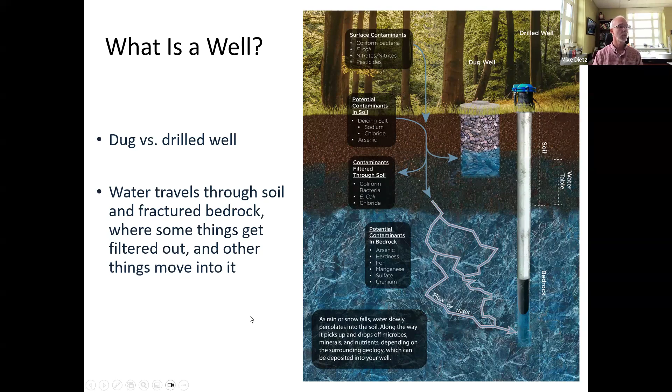Dug wells, you've probably seen this at some point, but these types of wells are often not sealed very well on the surface. I grew up in a house, for example, that had just a well house over a shallow dug well. When we would open up that cover, you would see a snake sitting there by the edge. It was very easy for things to fall down in there. So as you'd imagine, these types of wells are highly vulnerable to surface contamination on a good day, not even talking about a day when we have flooding.

I'll put one other note in here. Almost every dug well or shallow well that we've tested for our well testing program has come up positive for total coliform bacteria, and many also had E. coli bacteria. So these are things that are very concerning.

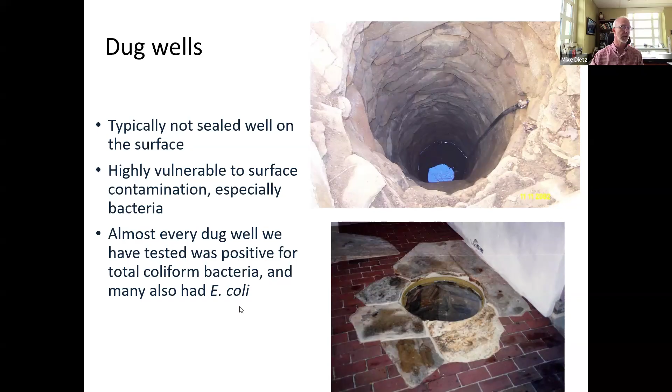Okay, so I talked about shallow wells, and now the difference with a drilled well is that a section of steel well casing is put down through the shallow soil. So we are now excluding water that's in the soil, that upper shallow groundwater. The bedrock casing is driven down and is supposed to be sealed into the bedrock so that any surface water that doesn't have a chance to pass down into the bedrock cannot get into that well, in theory. Then there's just a borehole cut down through the bedrock itself, and that's where water is drawn out from a pump placed down inside there.

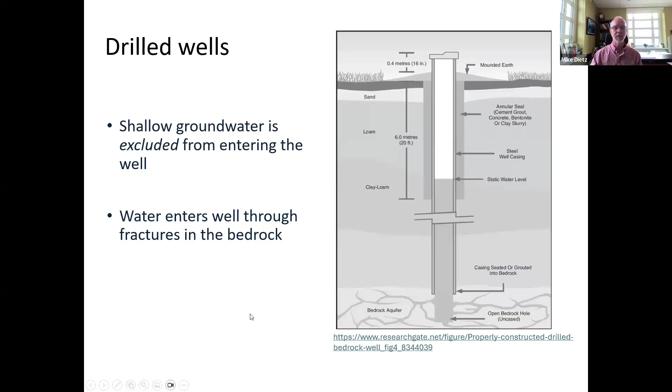So I'm going to give you a little bit of information about our well testing program that we've been doing for a few years here at UConn. This is just a little background, so it gives me some context to talk about the impacts from flooding. We've been doing some outreach for the past few years, and this isn't just me.

This is my former master's student, Alec Janis. He's at the table there, taking a sample from some folks bringing it into one of the events we hosted. We've been holding these reduced cost events and testing funded by a USDA grant and through some funding from the Institute of Water Resources. We've also been taking samples on a walk-in basis here on the UConn campus.

We found that many people, when they would test their well at all, which most people were not doing, the results they'd get from labs were often hard to interpret unless you had an advanced degree in chemistry. So we tried to make this much easier to understand for an average person, with clear indications of whether their water was meeting water quality guidelines. We also post Connecticut Department of Public Health's fact sheets from their website, and we've added a few of our own.

To date, we've tested over 800 wells in the state, quite a few across the state through various events and folks dropping in samples on the main campus. This is just a quick summary of the exceedances we found from those 863 wells we've tested to date. We've had quite a few exceedances of various parameters, which you can see on the left there.

The one that stands out is total coliform bacteria at the top, with 269 exceedances, which works out to 34% of people tested coming back positive for total coliform bacteria, 1 in 3. So how many people showed up in our meeting today? We got 61. So 20 of you, if we tested your water today, would likely come back positive for coliform bacteria in your well.

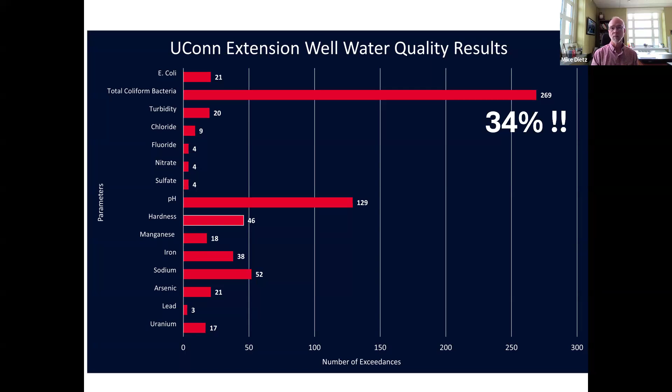This is obviously a very common concern. The coliform bacteria themselves are not necessarily harmful to your health, but they are indicators that other potentially harmful things could be getting into your well. I'll talk a little bit more about this.

Now let's get into the flooding issue and how this can impact private wells. If we have water ponding near or on top of your well, this is obviously very problematic, especially for a shallow well. These are the most vulnerable, because the water can pour directly in very easily, carrying with it the things that can enter in floodwaters.

If you've seen floodwaters come into your neighborhood, you know what they look like. It typically looks like chocolate milk. And there are lots of other things in there that should not be getting down into your well, things like bacteria, nutrients, and other potentially toxic substances it picked up along the way.

So although shallow wells are the most vulnerable, drilled bedrock wells can also be contaminated from floodwaters if that water gets over the top of the casing, or even below the surface, which I'll talk about in a second.

First of all, if you see this kind of condition on your property, you should stop using your water immediately. You do not want to be running that well if surface waters are getting in there. And you want to make sure you turn off the power to the well also, because if you flip on your tap by mistake or flush a toilet, that well is going to kick on even though you may not want that water coming in.

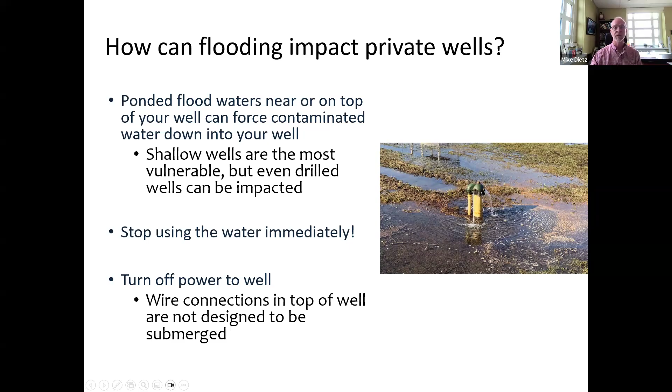So the best advice is to flip the breaker and turn that well off. Also, it actually may have been tripped anyway, because the wire connections at the top of a well are not usually set up to have submerged conditions. So that may have tripped the breaker already, but if it hasn't, you should turn it off.

After the floodwaters recede and it's safe to get out there, you should inspect the wellhead, look for evidence of water that had entered the well or rose up over the top of it, and see if it damaged the well casing, the cap, or anything nearby.

The next piece of advice is to chlorinate that well. There's a procedure for this that Connecticut DPH has on their website. The link is here, and I'll mention, if anyone is interested in these links, I have a couple in my presentation that I can drop into the chat when we're done.

Basically, you use the depth of your well to figure out roughly how much water you have in there, then measure out a fixed amount of chlorine bleach to mix with some water and dump down into that well. That's the basic procedure—it then runs through all the piping in your house and sits for a period of time before getting flushed out. The specifics of that procedure are in this guidance document here.

It's pretty obvious, I think, how flooding can impact a private well. But from what we've been finding, even heavier than usual rainfall can actually impact water quality too. So it doesn't necessarily need to be an obvious flood on your property, and this can also happen with bedrock wells.

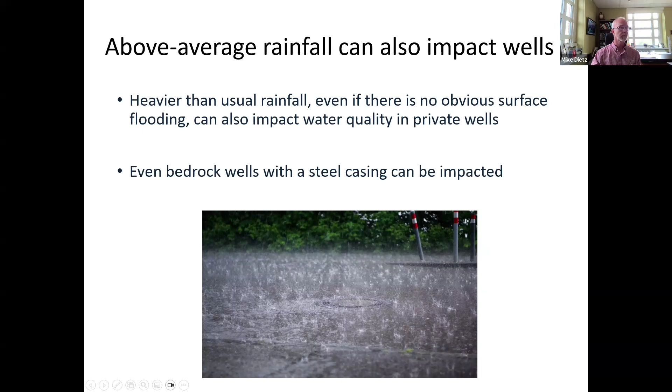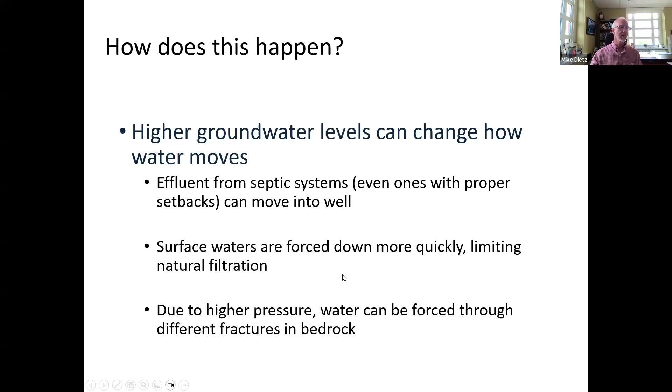The reason this can happen is that when we have excessive precipitation, it basically changes the subsurface hydrology. It raises that shallow groundwater table, and when that happens, it changes how water moves underground. It creates a higher pressure condition that can force water into places it wasn't normally going under normal groundwater conditions—forcing water into different fractures down in the bedrock, or moving it into different places even in that shallow soil.

So I guess I should start with this: many people that have a private well on their property also have a septic system.

It's not always the case, but for most people it is. There are regulations that dictate the setbacks between that private well and the septic system. But when we have an excessive amount of precipitation that raises those shallow groundwater levels, that can force water to move into different places that we would not expect it to be going. So there can be higher chances that untreated septic water could be entering private wells, either from yours or someone else's nearby.

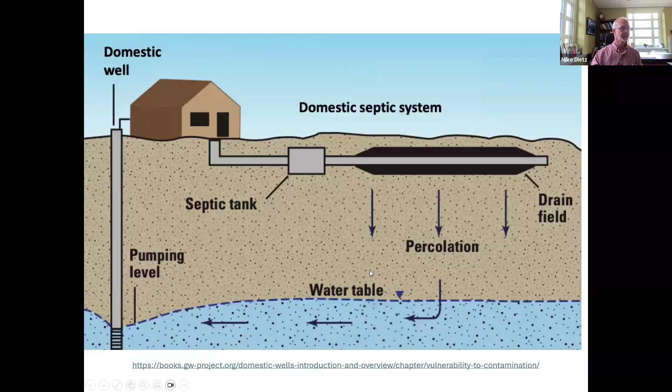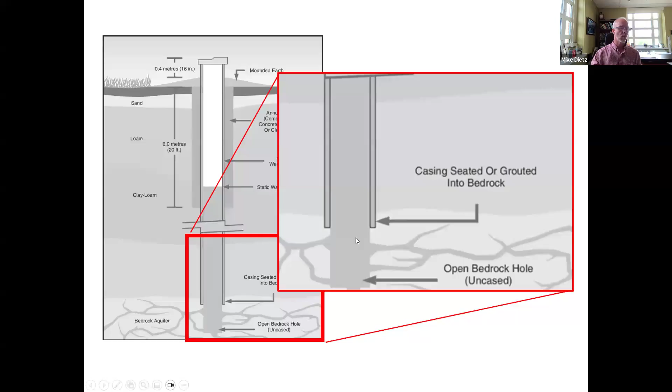One of the main reasons for this is because of where that casing meets the bedrock. I mentioned this before, I'll just zoom in on this for you. Historically, my colleague who retired, Gary Robbins, told me a lot of cases of this, and I've seen this myself, where these points where the casing is supposed to be sealed into the bedrock tend to be pretty leaky. That allows surface water or shallow groundwater to enter the well at that point, and that can be very problematic.

This is one piece of data I'll show you, and then I'll be setting up for our next speaker. These are some of our bacteria results, 4 years worth of data for total coliform exceedances, basically finding bacteria present, and E. coli. On the left side, the blue graphs, we have total coliform percent positive. On the right axis, the yellow bars, that's E. coli presence. So the way we read this: the first one, in 2022, 36% of our tested wells were positive for total coliform, 0 were positive for E. coli. I'll key you in on 2023, where we jumped up to 45% positive for total coliform and about 7% positive for E. coli.

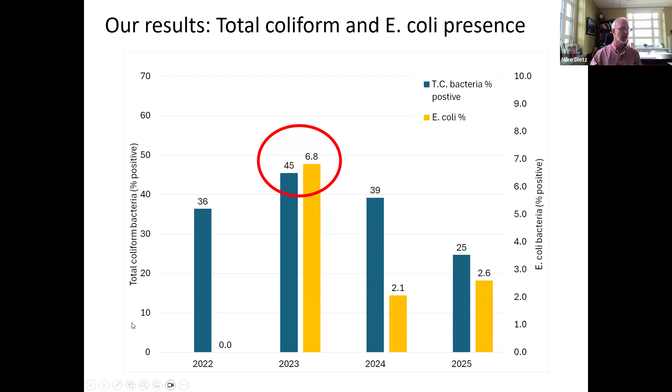If you remember the summer of 2023, our testing events were right after 2 months when we had twice the normal precipitation during that summer. So we saw this jump, and we suspect this was due to that excessive amount of precipitation getting into the shallow groundwater. We then dropped down in the last 2 years. Kind of interesting findings here, we're going to be exploring this data a little bit more in the near future.

This is just a document from EPA that basically summarizes what I've talked about here, what to do after the flood. Again, I can drop this link in the chat if anyone is interested in this. And now I will just set up our next speaker.

I'll just introduce the concept of stormwater runoff here. Because of the human developments on the landscape, the way we have changed the landscape over the course of the past several hundred years, we have dramatically changed the hydrologic cycle where the water meets the landscape. We've changed and increased the quantity of water that leaves the surface and flows off into our waterways, and we've also influenced the quality of that water as well. This is commonly called non-point source pollution. Runoff from agricultural areas is also a type of non-point pollution, but we're going to focus on urban runoff, although Tyler will mention agricultural runoff as well. These are typically pretty difficult to identify and control in many cases.

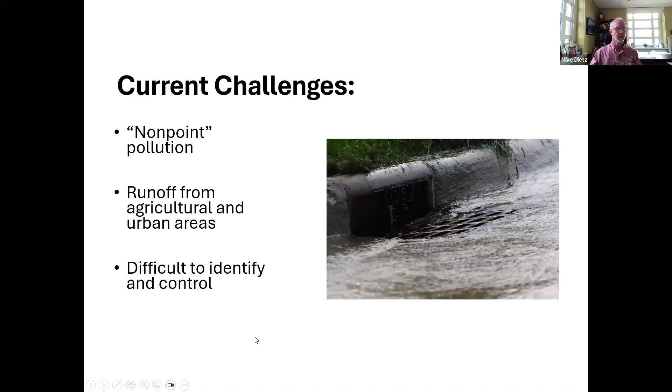The main driver here are impervious surfaces, things like parking lots, roadways, driveways, and rooftops, things that water cannot pass through. Water is directed off of these surfaces or down underneath these surfaces into pipe systems and then sent out, in most cases untreated, directly into waterways.

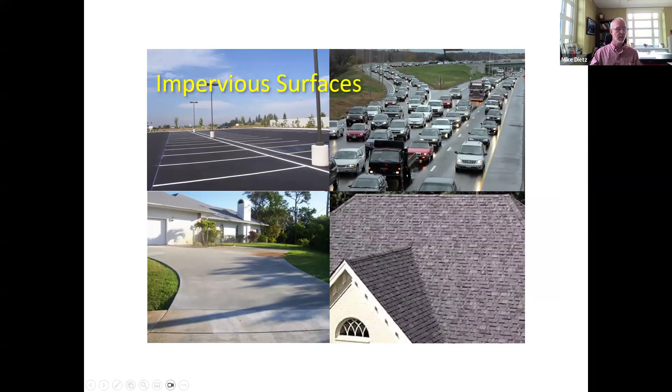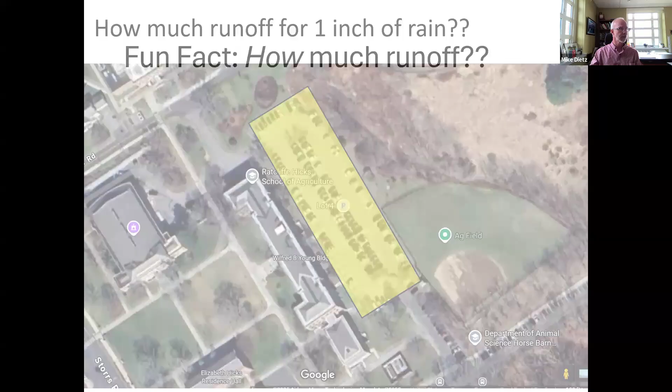I'll give you one quick example right behind the building that I'm sitting in here on the UConn campus. This parking lot right here, if we measure the size of it, it's about 48,000 square feet, just over an acre of land of impervious cover. We get 1 inch of rain, 30,000 gallons of water are going to run off of this parking lot. In an average year, that's 1.4 million gallons. Now, this lot has catch basins and piped stormwater infrastructure underneath it.

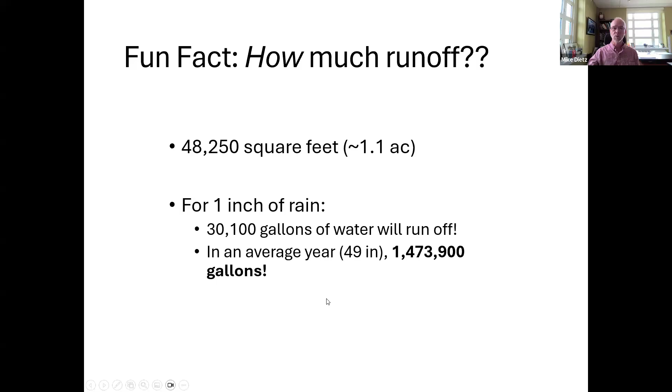So in my classroom, I would now ask the students, where does that water go? And I would wait to see if anybody had a sense of where that water moves from this parking lot. Well, I'll give you the short answer here. If you use a nice USGS tool called StreamStats, they have a nice little raindrop tracer. So where I drop this red star that you can see on the map, that was right in this parking lot, this will go down Roberts Brook into the Fenton River and then flow all the way down to the bottom right of your screen.

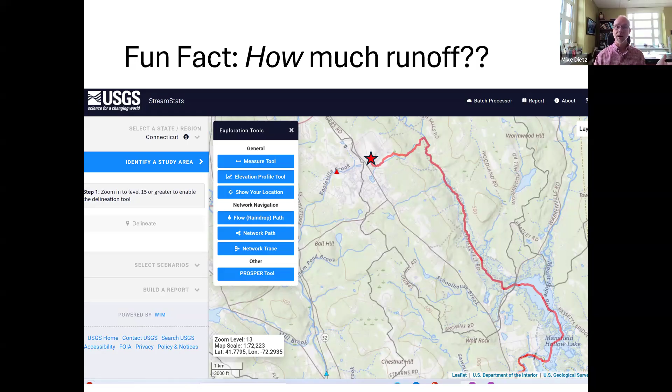If you see Mansfield Hollow Lake right there, that's where it ends up. So our next speaker, Tyler, might be very concerned about what I just mentioned. He's well aware that a good chunk of the UConn campus drains to this side and directly into his drinking water watershed. I'll let him follow up on that. But I wanted to illustrate that those numbers I gave you are from one very small parking lot, and there's much more impervious surface that drains to it. That's not even talking about a flood - that's just a regular rainy day example.

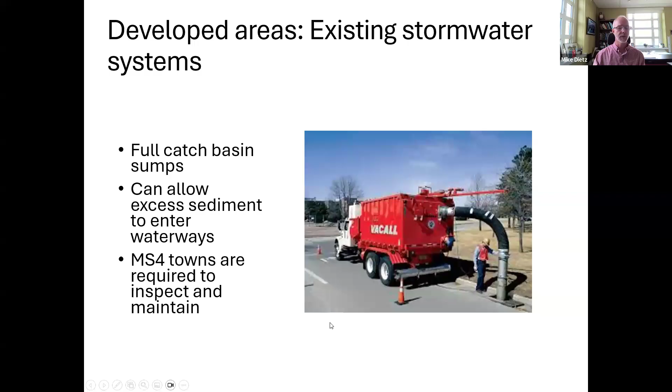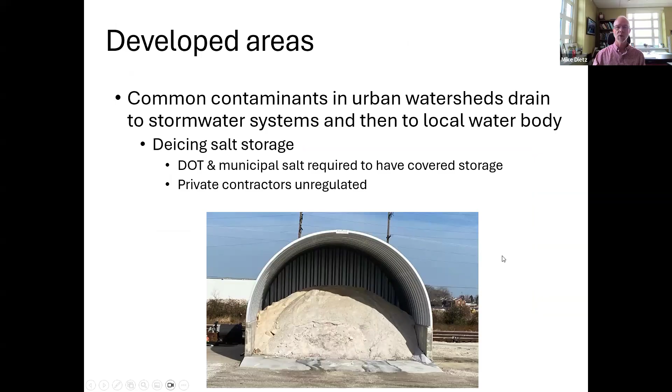Other things like construction activities - Tyler's going to talk about this in the watershed - where erosion and sediment controls should be in place. We hope these are checked on frequently, but sometimes they fail, and this is very problematic downstream, especially after big flooding events. Towns are supposed to clean out catch basins, but if not kept track of regularly, they fill up and allow excess sediment and nutrients downstream. There are also things like road salt stored in our watersheds. They should be covered at this point, but in many cases the application on roadways can be problematic.

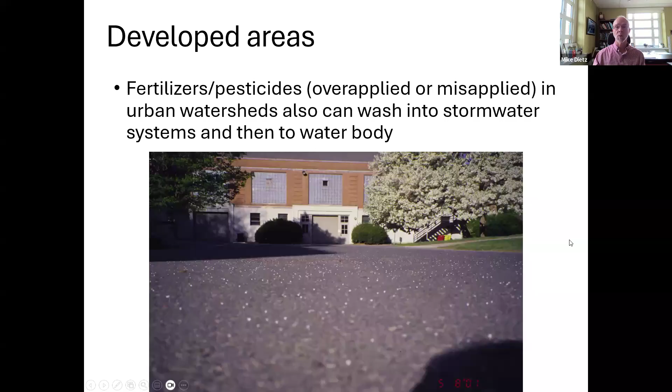And then lastly, fertilizer and pesticide applications throughout the watershed. If these are improperly applied, they can wash directly into catch basins and go directly out into those drinking water watersheds. So that's basically it for me.

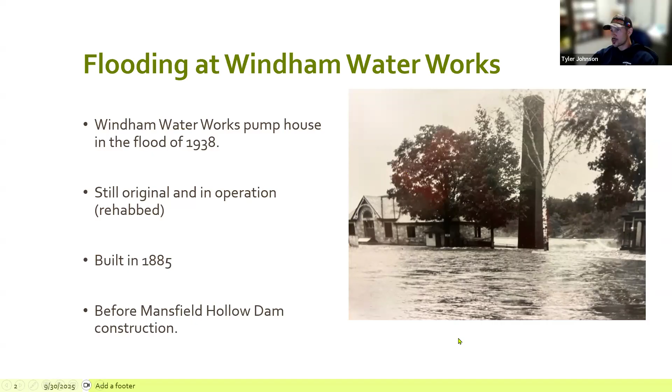A little bit about the Mansfield Hollow Dam. It started to be built in 1949. It was finished in 1952. It's a 14,000 foot long earth-filled dam. The spillway is approximately 700 feet long and about 68 feet high. The dam can provide flood storage for about a 5.8-inch rain event, or equivalent to approximately 14 billion gallons of water.

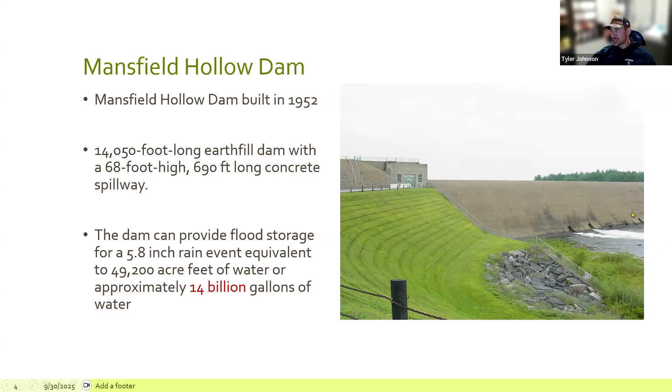The Mansfield Hollow Dam is located approximately a mile upstream from our Willimantic Reservoir, where our pump station and raw water intake are. Without Mansfield Hollow Dam, we would have a lot of issues when there's flooding, such as pumping, plant control, and most importantly, the treatment process that we go through every day. There's a constant influx of sediment and debris that would be coming down to us without this.

Luckily, our three main rivers that flow into Mansfield Hollow Dam deposit most of the silt, sediment, and debris that is collected throughout those rivers coming in, so we don't get everything there. If this wasn't here, our reservoir downstream would definitely be filled up with sediment and stormwater runoff, which would essentially decrease the reservoir depth, resulting in warmer temperatures, algae blooms, and extreme amounts of disinfection and turbidity management, which I'll go into what turbidity is in a minute.

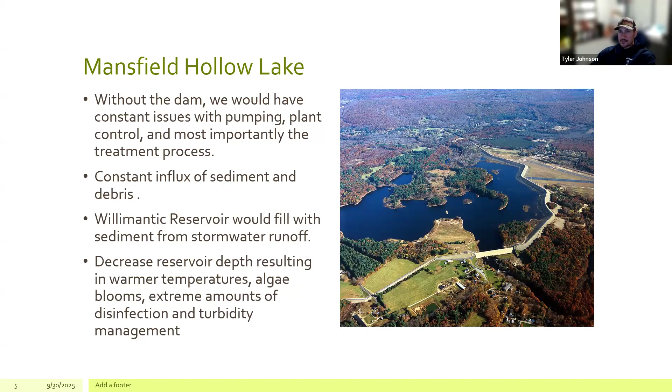This actually is an awesome tool that I use a lot, and I can drop the link in the chat after if you guys want. It's the Connecticut Department of Public Health Drinking Water Map, Source Water Watershed Map Viewer. It gives you a great idea, if you have or are doing a project within a watershed, of where it falls, if you need to notify, and who you need to notify, what water company.

The majority of it, we are lucky in a sense that we don't have a lot of urban area. The main urban area that we have, like Mike had mentioned, is UConn, University of Connecticut. It's kind of split right down the middle. The eastern half of UConn is in our watershed. So whenever there's any work going on up there, I always receive notifications on what's going on, so I can go up and take a look and make sure everything's all set.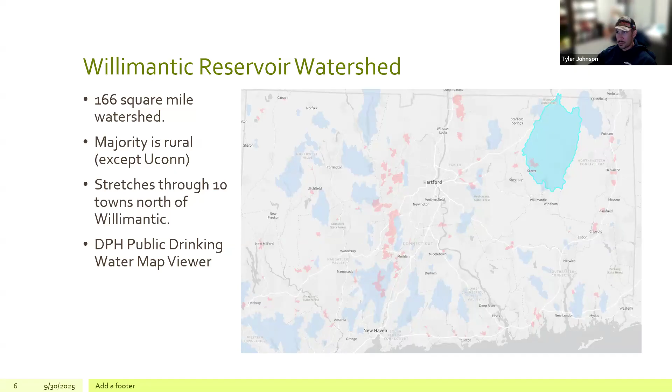Our source water is made up of three main rivers: the Natchaug, which is on the eastern side of the watershed, the Mount Hope, which is more in the center, and the Fenton, which is on the western side of our watershed. These three rivers make up the majority of the water in what most people call Mansfield Hollow Lake, or its original name, Lake Naubesatuck, along with groundwater infiltration as well. The dam is the only thing dividing this body of water and the Willimantic Reservoir, which is where we get our source water from, to provide drinking water to all of Willimantic and portions of Mansfield.

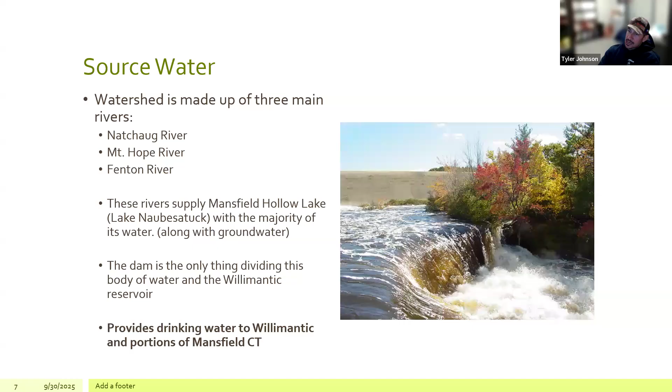So some challenges from flooding that we face here. Physical damage to equipment. Obviously, you get a lot of flooding and groundwater coming in through PVC that may damage electrical boxes, electrical motors, pumps. We have 2 raw water pumps that pump into the facility, and we have 2 finished water pumps that pump out into the distribution system. So those are very, very important and crucial for our everyday operations here.

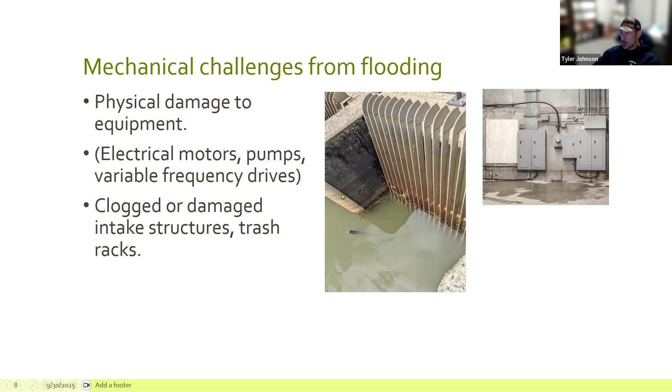So on the left-hand picture here, this is a typical trash rack or intake screen, which filters out a lot of the larger debris, so it doesn't get caught up in our pumps or the water wheel which we have. These are pretty crucial, but in high-scale flood events, there's a lot of debris, sticks, trees, vegetation that come down that could clog them up, so we don't get as much water in our raw water plant here.

Mike had mentioned that it's very important for towns and municipalities to have catch basin cleaning scheduled maintenance throughout the year. We would ideally like them to do it on an annual basis and keep track of which ones get cleaned so they can keep them free of debris, free of sediment, free of other contaminants, which will eventually make its way down to our reservoir.

Chemicals and nutrients are a big contributor to our pollutants that we receive here from a lot of farms. The manure has a lot of nitrates in it. There's other stuff from fertilizers, phosphorus, all things that have an effect on our treatment process here. And also, a lot of people aren't aware, but there is a growing concern for PFAS in certain fertilizers that farmers use, and these are called biosolids. So these are another thing that we have to keep an eye on that are now banned in the state of Connecticut for use. So these are impactful for us for our PFAS testing and all that.

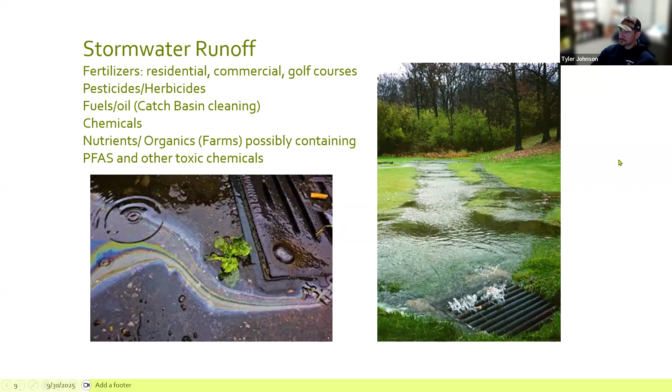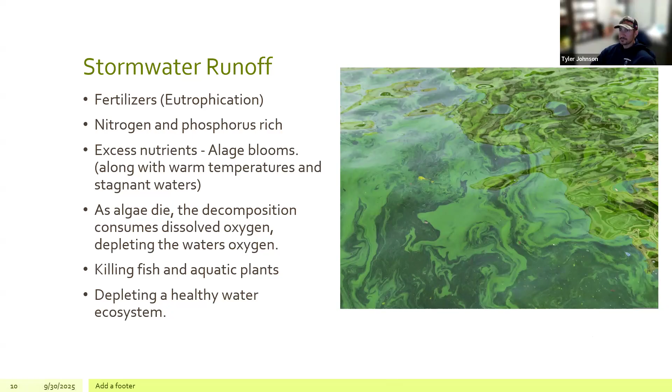Mike had briefly touched on erosion as well. Erosion has an effect in various ways on water quality. Large-scale rain events or flooding will often cause erosion on all different levels, small erosion, large erosion, which leads to the loss of reservoir storage capacity from the sediment buildup. So as you get runoff from streams along with erosion from rivers, all this sediment eventually makes its way down to us at the end of the stream. This causes turbidity, which I'll get to in a minute.

Bacteria overload, which is mainly caused by manure from farms. Contamination from washaway materials from sites of erosion on construction sites, whether it be fuel cans, chemicals, or anything near the edge of a riverbank.

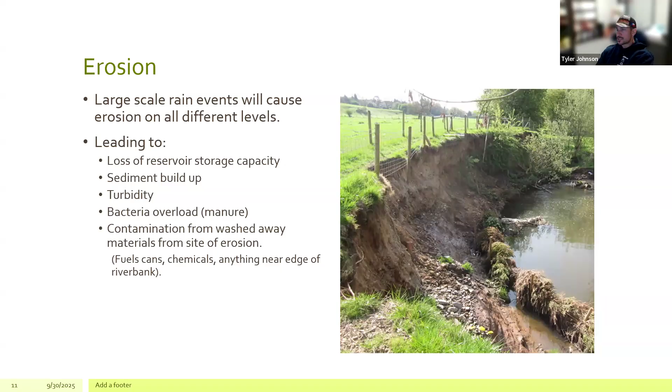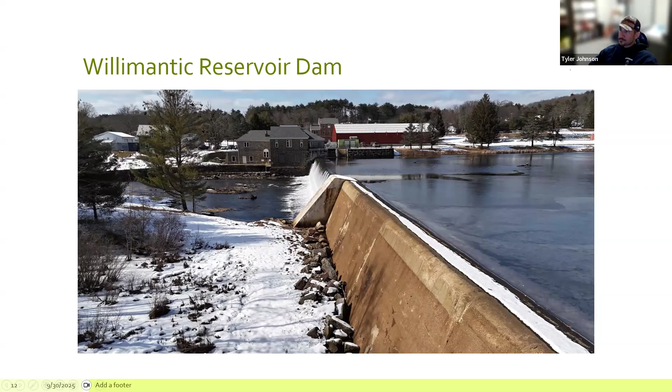So now I'm going to talk a little bit about flooding impacts on water treatment, specifically here at the Windham Waterworks. The main concern here is increased chemical usage. Heavy rainfall and flooding have a major impact; we have a total of 7 chemicals we use here, but primarily it impacts 4 of the 7. And those are chlorine dioxide, sodium hydroxide, polyaluminum chloride, which is also known as PAC, and sodium hypochlorite, which we could refer to as hypo, which is essentially a very strong chlorine.

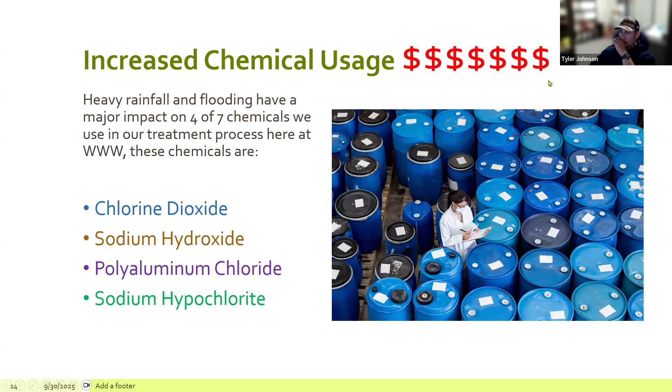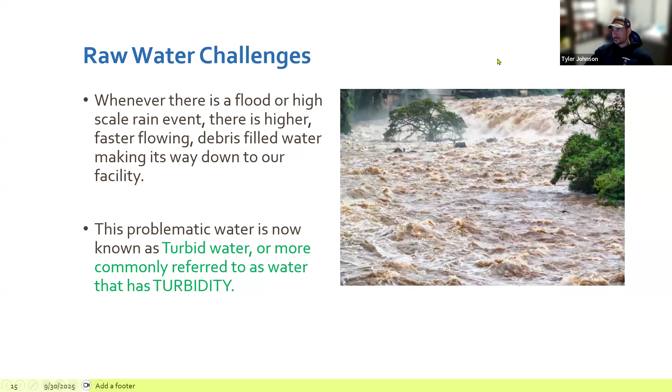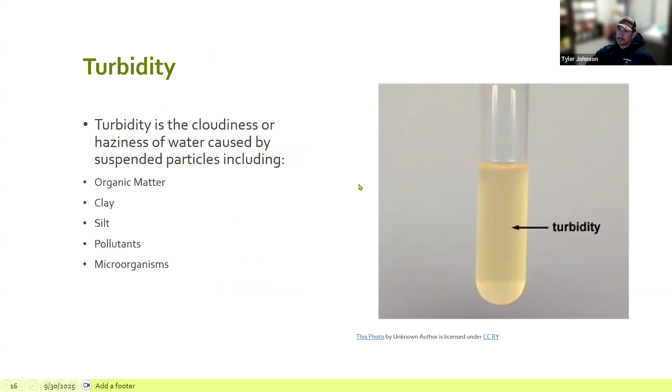The main problems with turbidity that we have here are it interferes majorly with our disinfection process. It clogs our filter bed media and reduces the lifespan of it. So we have to get our filter bed media, which I'll explain in some later slides, replaced much more frequently, which is not a cheap process.

And it also affects the water quality, the aesthetics of our finished water that gets put out into the system. Sometimes customers call and complain about a little bit of yellowish water, which can be iron, manganese, nothing that is harmful. But when we have very turbid water to treat, it's hard to get all of it out.

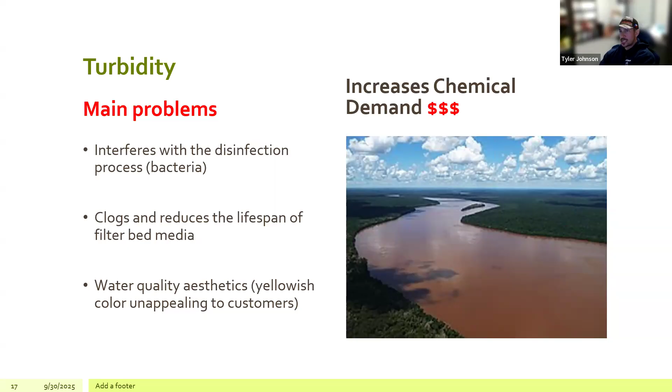Chlorine dioxide. All of our chemicals are dangerous, but this one specifically is very dangerous. It's a pre-treatment disinfectant and pre-oxidizer, so it's more used as a pre-oxidizer here at Windham Waterworks. It's a chemical that is made here on site due to its instability in storage. It's used as a pre-treatment chemical.

And its primary job here is the process to remove contaminants such as organics, including iron and manganese, like I just mentioned, through the process of oxidation. When it's added, it reacts with the particles, pulling them out of solution so they can be bound together in the next step of the treatment process, which I'll explain in a minute. So essentially, the more turbid the water, the more chlorine dioxide that we have to use.

Sodium hydroxide, which we call caustic soda, is also very dangerous with a pH of 14. This is injected and used in our pretreatment process as well after chlorine dioxide, so this is the second chemical in our treatment process. Its purpose is to add hydroxide ions, which drives the alkalinity of the water up. So its function is to make the pH most optimal for the next step in our treatment process. The chemical in the next step works best between the pH of 6 and 7.5. So that's essentially what this chemical does, is get it in the correct pH range.

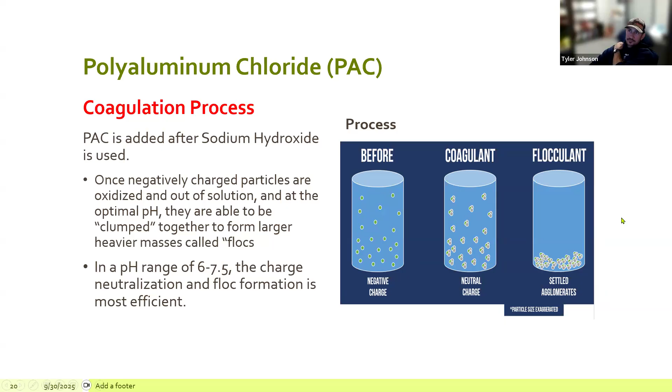So now the flocs are stable and dense, resulting in better sedimentation and filtration. In other words, they will sink to the bottom of the tube settling chambers in the next process and be pumped out to our drying beds where they lay out to dry and are disposed of. The smaller flocs, which don't settle, will have to go through our filtering process in the filter beds through our trifecta of filter bed media.

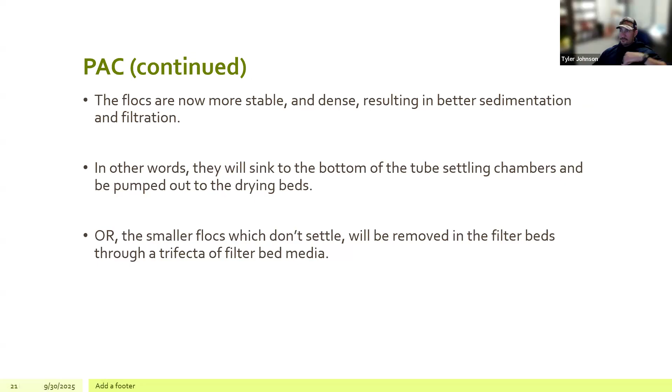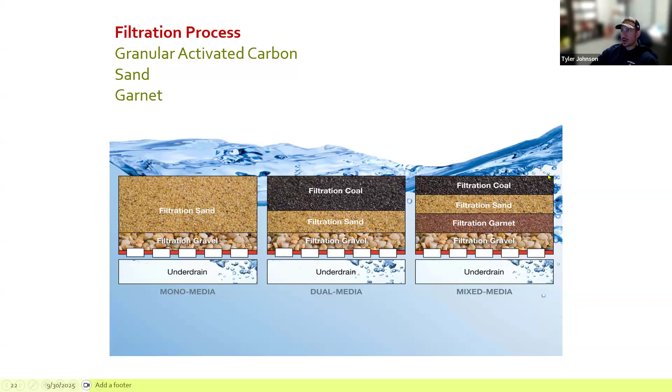So a quick recap: flooding carries pollutants into the rivers, which we have 3 of. Those rivers carry the pollutants to the reservoir, contaminating and destroying the ecosystem and raw water quality here, which makes it much more difficult and costly to effectively treat and produce potable water.

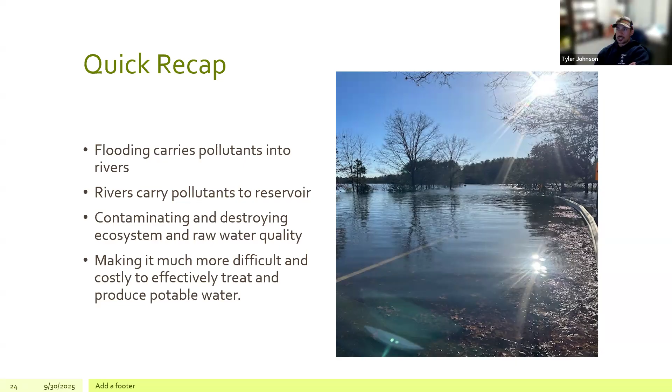So that's pretty much all I have here. And like I said, Mike is a great asset to have. He's actually taught me a lot down here at Windham Water Works, and I look forward to working with anyone who wants to know more about it.